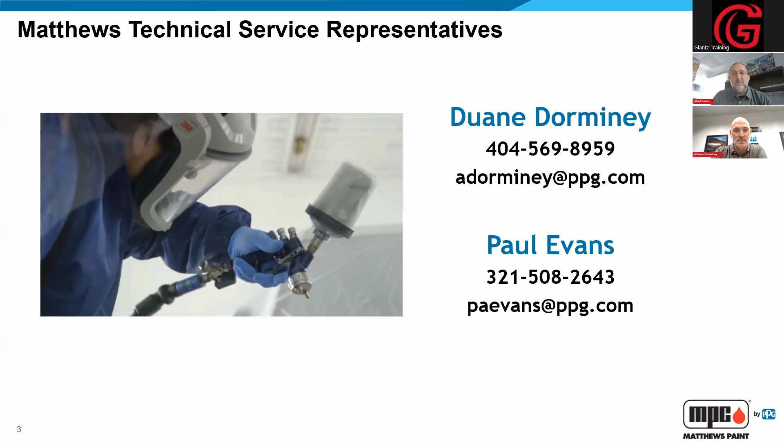All right, so the topic today is about primers. Primers are going to build the foundation of any job that we do. That's where we're going to start. What do we need to do to get this ready for paint? So if we look at primers, we also refer to them as being undercoats. And if you really get into it, there's different categories of primers. There's a few that we really focus on in our industry. So let's look at a few of these different types of primers and where they're used.

Etch primers. Just like the name says, an etch primer actually etches into bare metal. It does provide adhesion, provides corrosion protection, and that's done through an acid. And if you'll notice, our etch primers all come with their catalyst in a plastic bottle. We can't put acid into a metal can. So that lets you know right away there is acid in there. That is what's giving us adhesion. It actually bites into that surface and creates a barrier that helps protect the metal and give us adhesion for the top coat that goes on top of it.

These are not filling primers. We've had some primers in the past that were referred to as fillers. Out there in our world they were used that way, but they weren't really designed for filling. They are generally not designed for sanding. You can sand them if you need to, if there's imperfection, or if you just get past that top coat window, but that's not what they're designed for. They're designed to be sprayed on and then top coated over, usually in about 30 minutes, and depending on the temperature, usually it's considerably less than that.

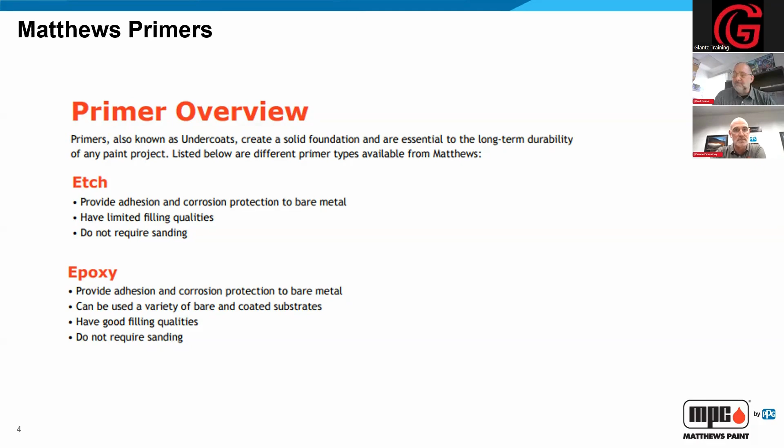Our epoxy primer, the 274, 528, 530, 531, that series has a 4-day top coat window. So that really gives you a lot of time before you would actually have to sand it. So very universal. They'll go on a lot of things. They are a little slower. That's the only real drawback, is that they are a little bit slower than the etch primers. And really, when you compare the two, you're talking about 15 minutes or so difference. You can really top coat the epoxy in about 30 minutes as long as you put one coat on. But great product. It's my go-to. I really do like epoxy primers.

Beyond that, we want to add polyester primers. Now, this is where we... Paul, I have to jump in. Sorry, there's a little bit of delay apparently from the internet connection.

I want to add to something you just said because it was a great point. Etch primers are the fastest primer that we have. If you want speed and production through your paint shop, etch primer is going to be the way to go. But etch primer has that restriction that Paul pointed out of bare metal only. And where shops run into potential problems, what we see commonly in the shops we go into, is when a piece of aluminum has to be repaired with a little bit of body filler, there's a little scratch, a gouge, or a dent that needs to be fixed. That eliminates etch primer as a possibility because there is no adhesion from that etch primer on top of that body filler.

And when you apply paint over that etch primer that isn't adhered to the metal below, it leaves an outline and a ring around whatever's underneath it, and there is no adhesion to the metal in between those two things. So that's where epoxy comes into play, and it can go over the metal and the body filler. Everything will be hunky-dory, just fine. And as Paul mentioned, you've got to wait an extra 10-15 minutes for flash and for it to be solid enough to paint over. But given that, it's a much better option if you're not dealing with perfectly clean bare metal only.

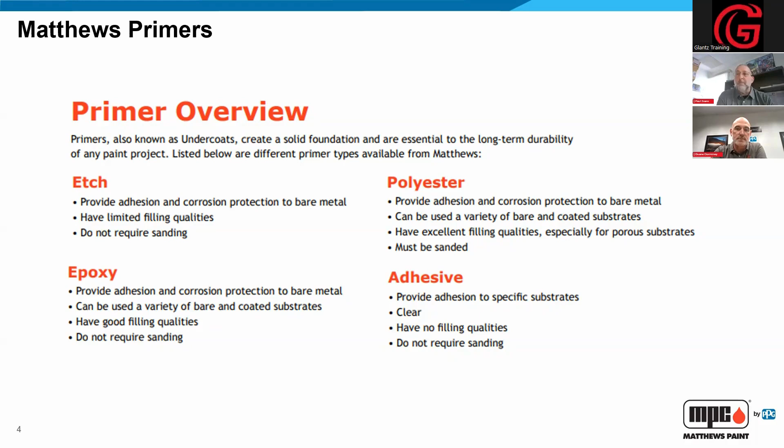One thing else to add here: all the primers Paul has covered here, etch, epoxy, polyester, and our adhesives, they're all chromate free, heavy metal free. They don't get you sideways with any of the EPA rules regarding any of that stuff. Some of the older etch primers Paul mentioned used to have the word filler in the name, but those have all been discontinued because of the heavy metal restrictions and the rules.

So we have our chromate free etch primer, 74-350, and we have our brilliant white primer that's also an etch primer. Those are our two options in that category. Paul mentioned the epoxy, and then we're going to talk more about polyester after substrates.

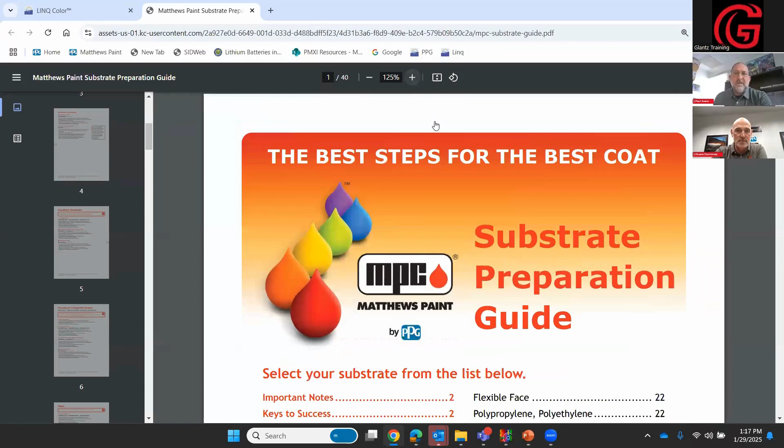Excellent. Very good. And what I'm showing on the screen now is our substrate preparation guide. This is on our website. And if this works properly, it should take me there. Okay, let me pull it over here. And this is right from the website. All right, let me just bump this up a little bit bigger. All right, I think that might be a little easier on your end to see. This is a fairly large book, as you'll see. Here's the index on the front page.

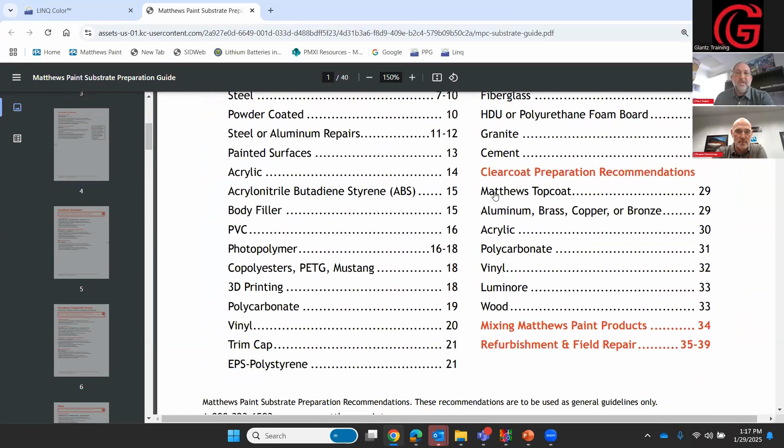And there's about 40 pages roughly of different substrates and what those preparation steps are. How do we clean it? What primers can we use? What's the preparation steps? If it requires sanding, what sanding grits can we use? So we won't have time on this call to go through all of these, but I would like to hit some of the most common ones.

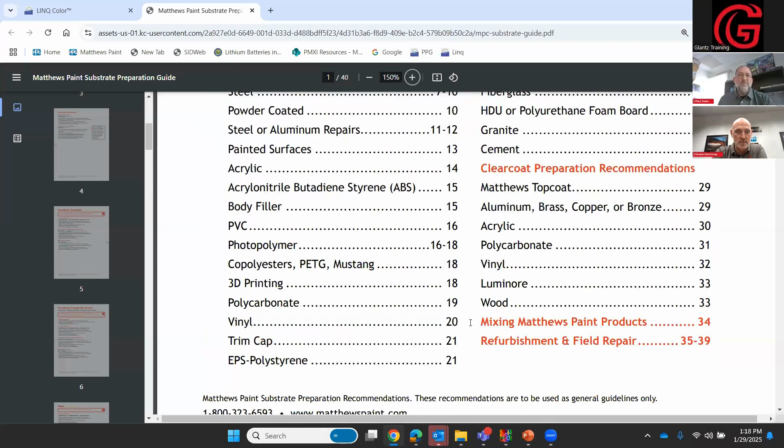And we'll start out with aluminum. Probably the most common substrate in our industry is going to be aluminum. There's some good information in here. If you don't have our substrate guide or if you've never looked at it, I encourage you to go to our website, pull it up, and you'll see there's a lot of good information here. We have this available as a booklet. If you want a printed copy, we can make those available to you as well.

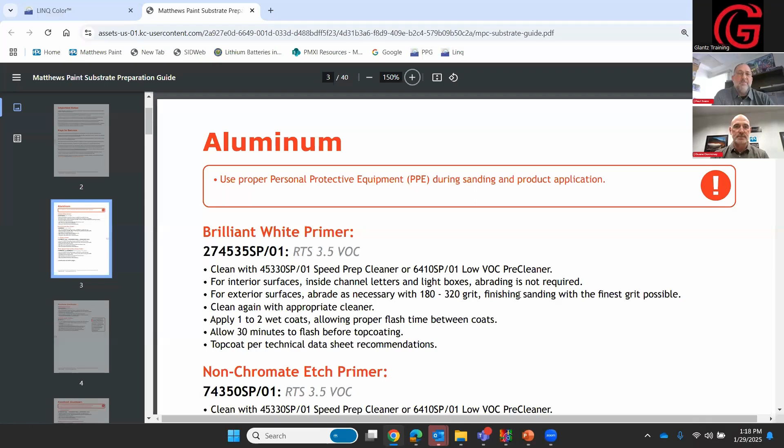So this is the way it starts out. We start with aluminum and it lists out the various primers. You'll see the first one here is Brilliant White Primer. So Brilliant White is an etching primer. As Duane said, we have a couple of primers and they are chromate free. The names of these two primers, I'm going to scroll up a little bit more so you can see the two of them. There, I'll stop it right there. So Brilliant White, 274535, and non-chromate etch primer, 74350.

I like to talk about these simultaneously because they are similar products. They're etching primers. They are both 3.5 VOC. They are both chromate free. Really, the only big difference is the fact that Brilliant White is white. The non-chromate etch primer, 74350, is a greenish color, kind of a military green. It actually sprays nice. It's easy to see it going on. But in our world, many times a white primer has a lot of advantages.

And the Brilliant White happens to have a dual purpose. It can be used as an exterior primer, or it can be used on what we refer to as interior surfaces, and that's going to be inside of a channel letter, inside of a light box. Now, that box might go outside, but it's not exposed. It's inside a closed box for reflectivity. This is a great product to use. So now you have one primer. You can prime the inside, you can prime the outside, and then the inside's done. It's white, it's reflective, and that's all you need.

The green version, which is the 74350, actually has more pigment in it. So it covers better. You'll see as you spray that green version, your metal will cover immediately. One good coat and it's done. Now the Brilliant White, to keep it white, we have to leave some of those ingredients out to make sure it stays nice and bright. So it can have a little bit of a transparency to it. Probably one of the biggest things is people, when they started using the Brilliant White, were putting it on too lightly. It needs to have a good coat, and depending on the circumstances, possibly two coats.

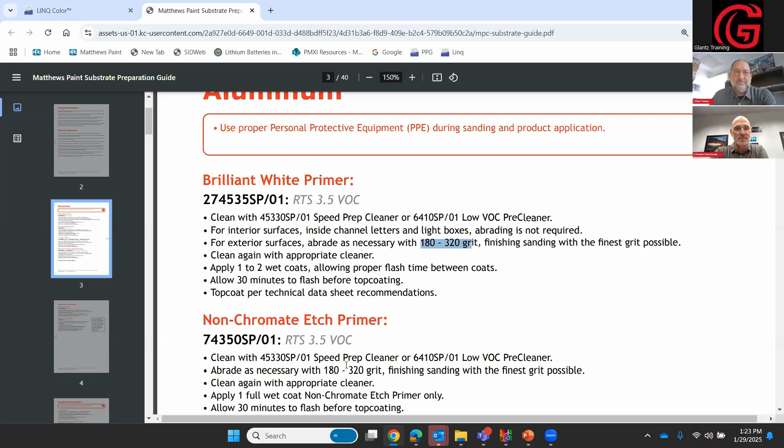Dwayne, anything to add on the etch primers for aluminum? The only thing I would add to that is you mentioned solids content at the very end. Just for a simple explanation, when your paint is liquid, it's got a bunch of solvents in it. And the solids content is what is left on the surface after that paint dries. So these new versions leave literally double the amount of film on the surface than the old ones used to. Great point. Thanks, Blaine.

That'll move us into the epoxies. The one I'm going to focus on is the 2.1 epoxies. You'll see that right in the middle of the screen. There are three different colors, three part numbers: a gray, white, and a black. I've sprayed a lot of epoxy primer in my career. I started painting back in 1984, and I've sprayed gallon upon gallon of epoxy primers. This is my favorite by far. Very easy to work with. It sprays very nicely. It goes on like paint, and it actually looks like paint. And as we mentioned earlier, it is more universal. It'll go on more substrates.

If you're spraying an etching primer on a large surface, one of the things you'll notice, especially in a warmer climate, is you're going to have a lot of dust from that overspray because they are drying faster. So depending on your booth, how quickly it's evacuating the overspray, that overspray may dry in the air and end up back on the surface as dust. And that can create problems in that paint job. Epoxy primers do have a wetter initial period. They go on smoother, they go on wetter, but you end up with a cleaner paint booth, if that makes sense. You just don't have that dry spray.

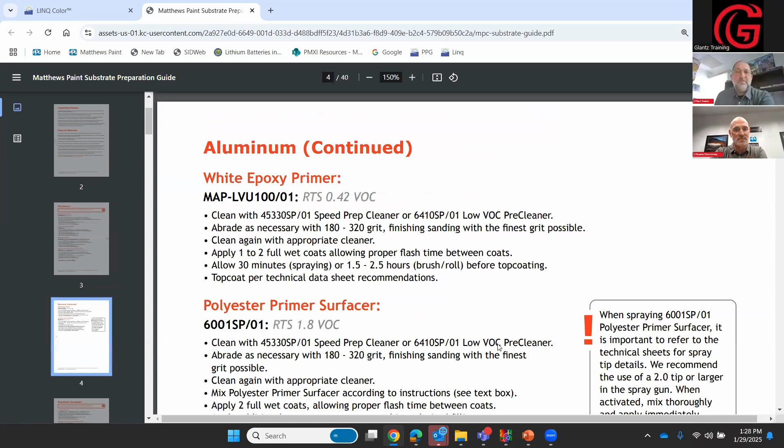All right, so I'm just going to kind of scroll through here. I'm not going to go through every single primer on here. I want to touch base on a few different substrates. And as you can see, there's a lot of recommendations for a lot of these various substrates.

Paul, can you back me up there and chat about anodized? I can.

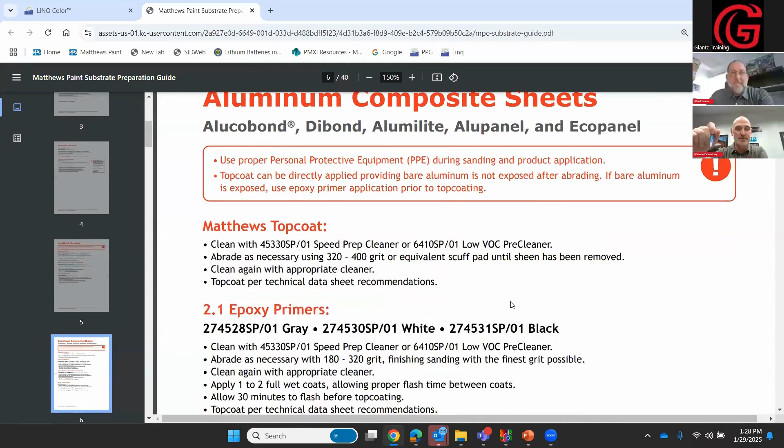Just point out the one key thing with anodized there, because we do run into this from time to time: if you get a piece of anodized aluminum, that anodized coating is made to not have anything stick to it. It's super durable. It is very hard. And the other side of that is paint doesn't like to stick to it when you try to paint on top of it.

So our recommendation, what I always say when I teach classes, is when you look at the substrate guide, you need to read this red box at the top of each section at least one time, because there's some important information in there every once in a while. And this is one example of that. So when you come across anodized, you got to get all that off. And sometimes it's better just to scrap it, start with bare milled aluminum versus trying to get all the anodized out of an extruded piece or something like that.

So pay attention to the type of aluminum that's coming through on the jobs. And if it's got to be painted, try to get regular aluminum and leave the anodized pieces for stuff that isn't going to get painted.

Very good point. And you'll notice that we don't list any etch primers in this section, epoxy only, because we know there's probably a good chance that some of that anodized coating is going to get left behind. As Duane said, the goal is remove it all. If you don't remove it all, an etch primer isn't going to be able to reach the bare metal. So if anything has a chance to stick to it, the epoxy will. But the best option, our recommendation, is get it off of there, and then you're starting basically with bare aluminum.

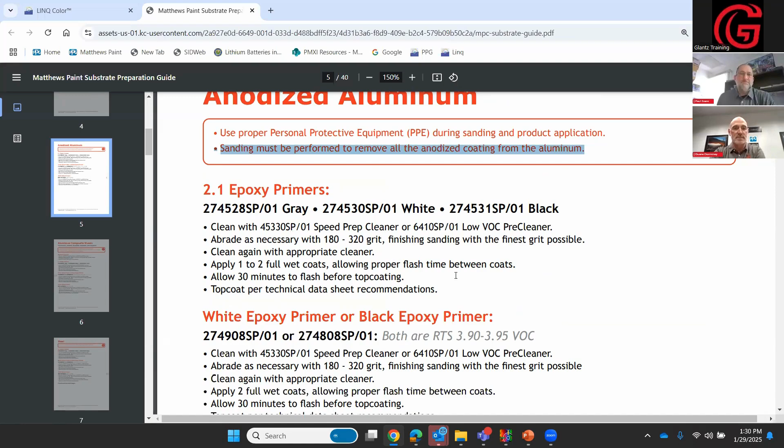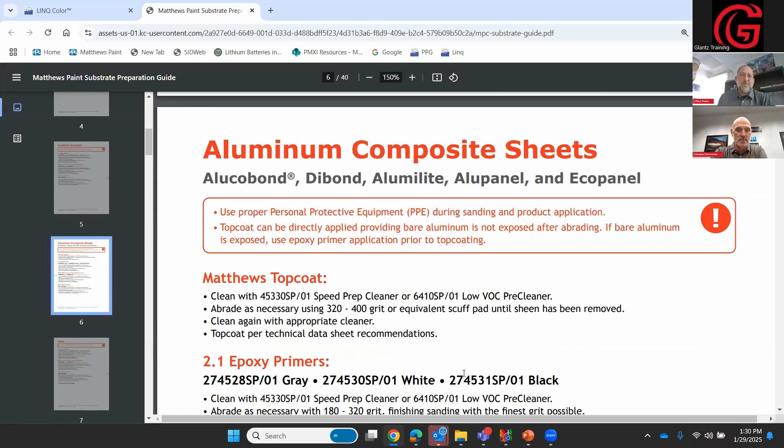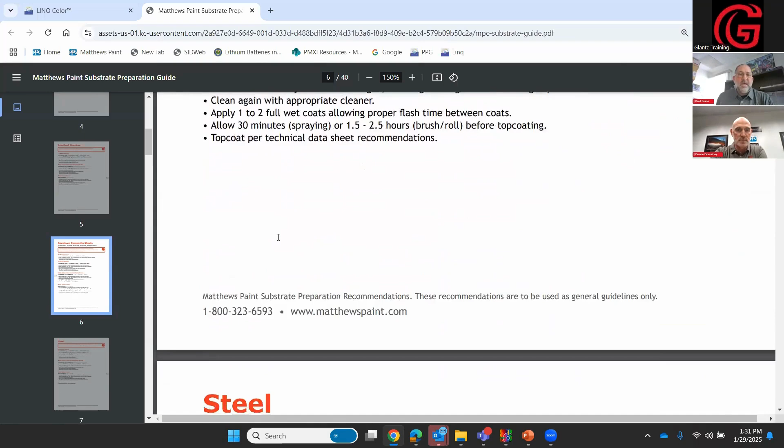Okay, I'm going to roll through here. Aluminum composite sheets, I'll touch on that quickly because these are quite common in our industry. So pre-coated aluminum, you can actually just clean them and sand them or scuff them, either one. And as long as you don't break through anywhere, you can apply our top coat right directly over that. If you do break through somewhere, you get a little heavy when you're sanding it, a little too aggressive, epoxy primer is a great option. And you'll see many of the prep steps are repeated over and over again. So the goal is just find out, based on that substrate, which primers can I use.

Steel, you're going to see epoxy primers listed first. We usually put the primers first that we feel make the most sense. We do have etching primers listed under steel, but my personal preference is epoxy primer. It just works better generally. It's a little bit more durable.

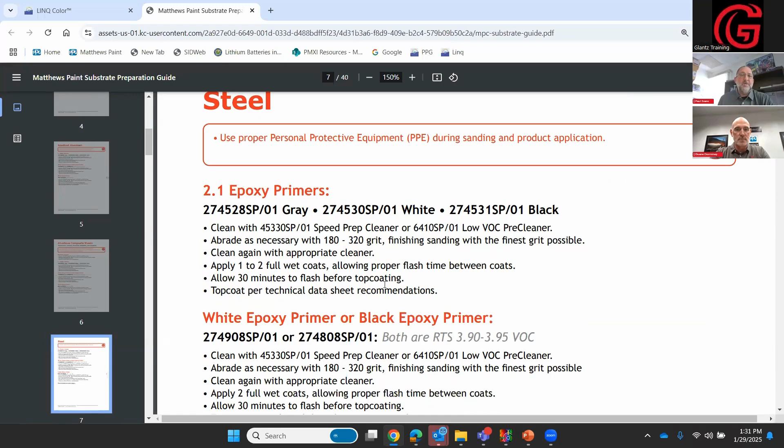Steel, you might have the rust issue. You may already have some rust on there. The idea is get it clean. Make sure it's all off of there. We know that doesn't always happen. So epoxy primers are a little bit more robust as far as sealing that down. But we would recommend getting everything as clean as possible. And then the epoxy primers work extremely well.

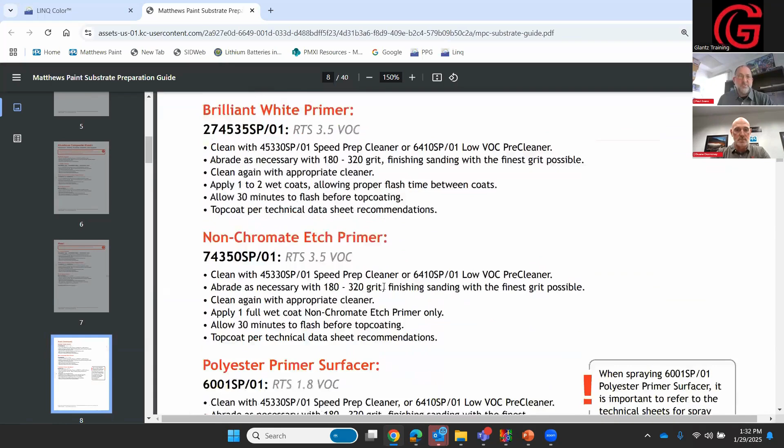Now I'm going to scroll through a couple of other subcategories. And you'll see there's steel, there's the etch primers listed. You can even use a polyester primer. And then we're going to get to galvanized steel. There's a lot of different things in this category. As Dwayne talked about, the red print in these boxes, you'll notice a lot of information. I'm just highlighting it there quickly. This is important information, especially with galvanized steel. If you are working on a project and you have an option, I prefer not to use galvanized steel.

Galvanized steel is generally left galvanized because it's designed to stand up on its own, to have its own protection from that galvanizing. If it has been galvanized, there's oftentimes going to be oils, protective layers that are put on there, passivation layers. These are all things that can create problems.

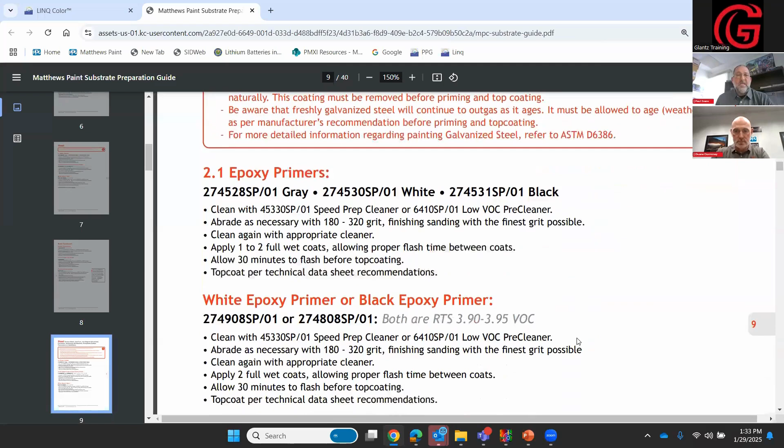Even if it's newly galvanized, that outgassing of the zinc, those are all things that could potentially create a problem on galvanized steel. So cleaning it thoroughly, allowing it to age as much as possible, that does help you. If you are ordering galvanized steel, ask that it not be passivated. Just get the galvanized steel as it is, and then you can follow these steps. Thorough cleaning, thorough sanding, and then epoxy primers are going to be your best option on galvanized.

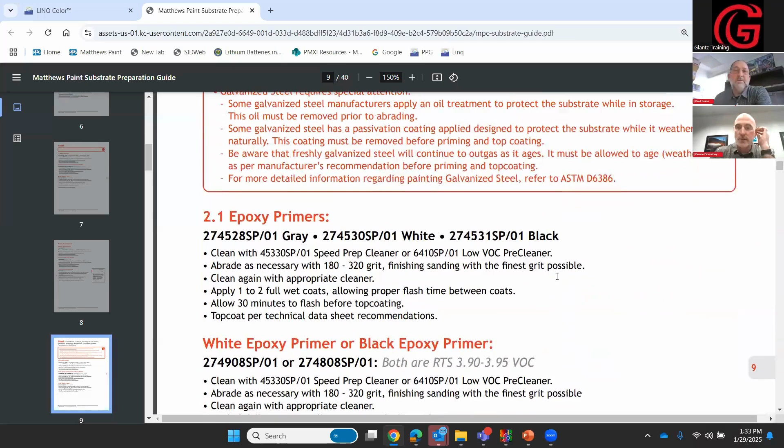Hey, so Paul, we got one question in the chat already, and we're going to leave some time at the end of this thing for a full question and answer, but this one is timely. Do we recommend spraying epoxy primer before polyester?

Oh, that's a great question. I think that's absolutely fine to do. In the automotive restoration world, that's kind of a must. Everything gets epoxy primer first, and then your body filler, which remember, we said polyester primers are very similar to body filler, same chemistry, goes on top of the epoxy primer. What you're basically doing is you're priming, you're encapsulating that bare metal, and then you're going to put something on top to give you your fill, whether that be a body filler or a polyester primer.

The important thing there is to make sure you allow enough time. Depending on how heavy you put your epoxy primer, it really is best, in my opinion, just to be on the safe side, wait overnight, and then you can come back. I'm not saying you can't go faster than that, but if you get on that epoxy primer too quickly, that's when it can cause problems. So overnight is a safe bet.

You don't necessarily need to do that process. It may be overkill in our world, but it is a good way to do things because now you've got a good protective layer underneath the polyester. And especially if it's steel, you now have that steel that has been protected. And then you put your filler on top of that. So, Dwayne, anything to add?

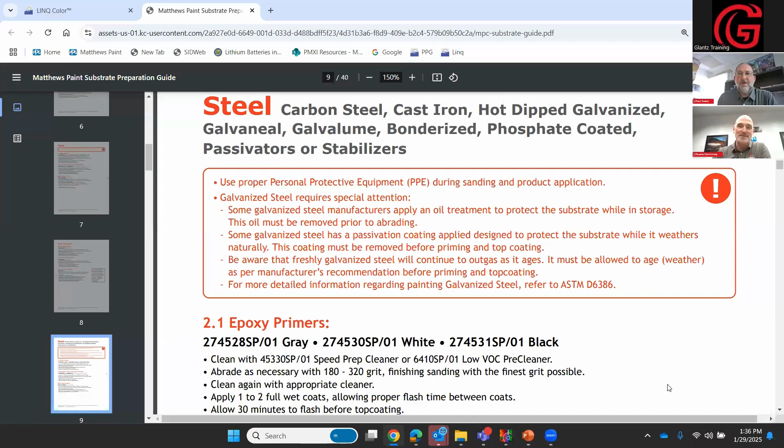Okay, I'm going to scroll down through here. You'll see the epoxies listed. I'm going to get down to stainless steel. Now, I realize stainless steel probably isn't a common substrate, but every once in a while, you're going to have something. I get calls on a fairly regular basis of what do we do with stainless steel? I've heard everything out there as far as every kind of primer or adhesion promoter. But we only have one recommendation.

And you will notice it's the 2.1 epoxy primers. Again, this is a primer that is very durable. It holds up well, and it is the only recommendation we have for priming stainless steel. Now, one thing I do want to point out here, most of these steps are very similar over and over again, but here's an exception, 80 grit. With most bare metals, we can go 180 to 320, somewhere in there. But now we're looking at an 80 grit. Stainless steel is just so hard. We need to make sure we're putting a good thorough sand scratch on there.

So clean it good. And by the way, I hit that earlier and I wanted to expand on it a little bit and I forgot. The reason that we clean first before we start sanding, and then have to clean it again, we clean it first to make sure we get all those contaminants.

Anything that could be on that surface, we want to get it off before we start sanding it, regardless of the substrate. If you're going to start sanding something, our first step is always going to be clean it first with the appropriate cleaners. And you will see those cleaners listed on each one of these substrates. It prevents you from driving contaminants down into the substrate. It also helps protect your sandpaper and make your sandpaper last longer and cut better.

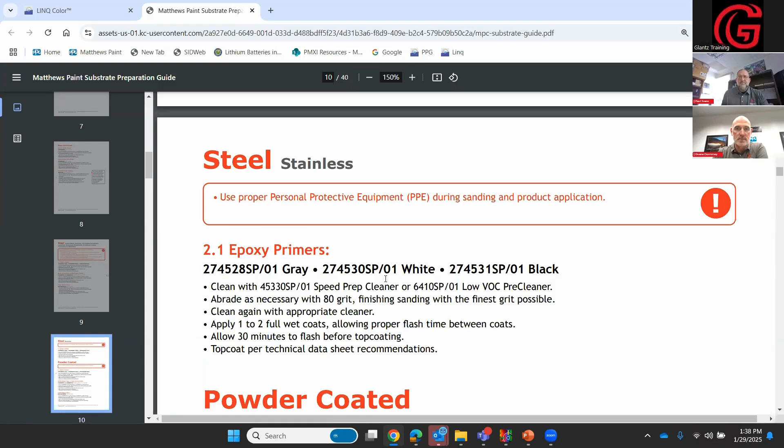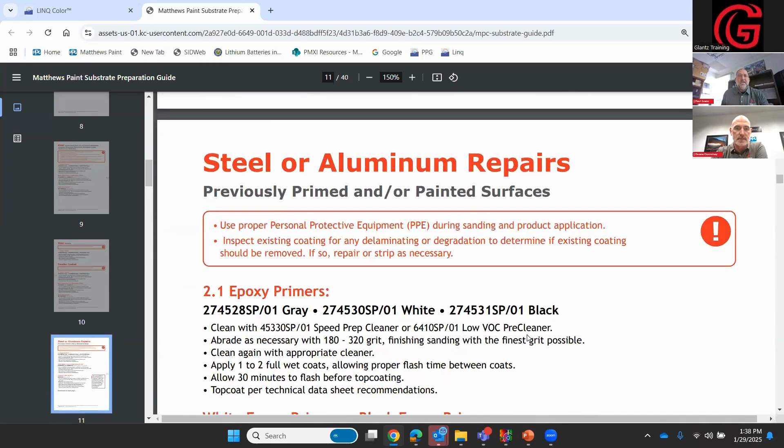So clean it thoroughly, sand it thoroughly, clean it again, and then epoxy primer, and it works great on stainless steel. All right, I'm just going to kind of roll through here, just like you did on the last one. Any questions about a specific substrate, you can jump in there in the chat, and we'll either cover it or back up to it. Steel and aluminum repairs.

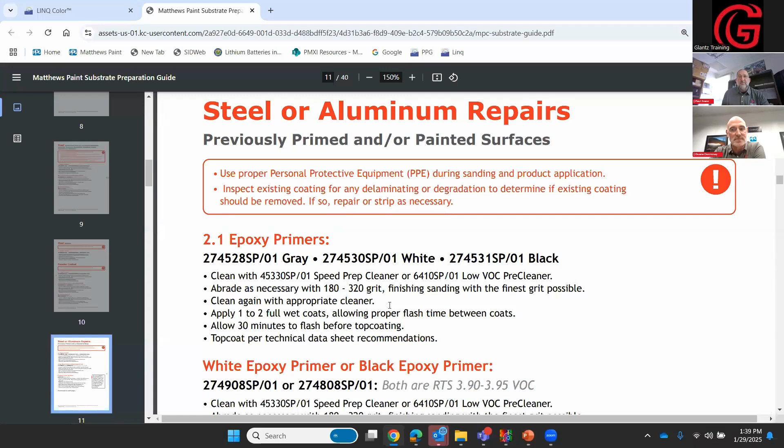This is when we actually have something that is already painted. And you'll notice there's our 2.1 epoxy primer. There's a theme. If you haven't picked up on it yet, there is a theme. 2.1 epoxy goes on a lot of substrates. And especially if you have multiple substrates you're doing at one time, this is a product to use. The only thing I really have found that it doesn't stick well to is acrylics, and plastics can be a challenge to put epoxy primers directly to them. Other than that, epoxies work extremely well.

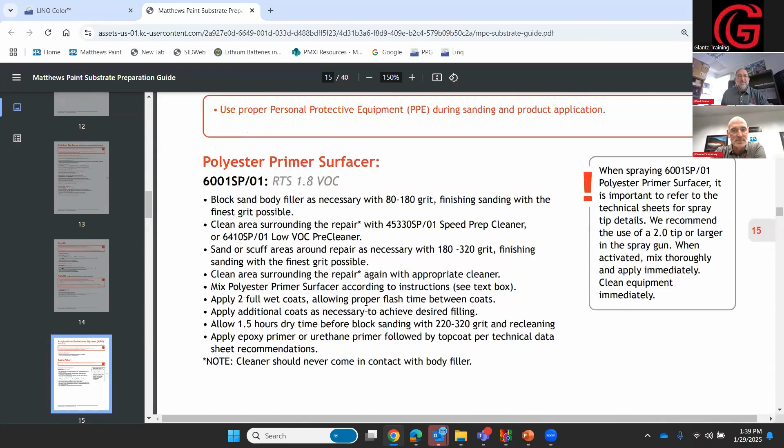But there's your polyester primer. I've kind of skipped over it, even though it's been mentioned a few times. This is the 6001. This has been around for a long time. It can be used on a lot of substrates, but don't use it unless you really need it. And here's a good example of where it works really well. Body filler. So this is a polyester primer. It acts differently. As I mentioned earlier, it gets very hard. It has to be sanded.

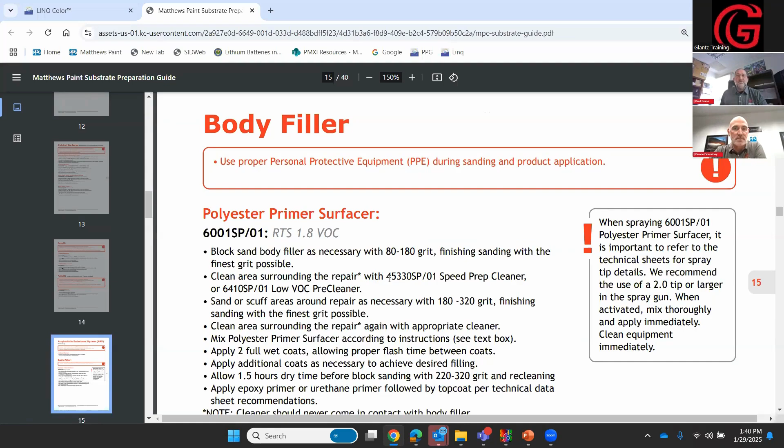I'm going to spend more time at the end. This is one of our key focuses in this webinar, the polyester primer. So other than the fact that it works great on body filler, that's about all I want to touch on right now. And I want to scroll through a few more of these, and then we'll circle back and spend some time on the polyester.

PVC, we can paint PVC quite easily, but you will notice something. There's polyester primer mentioned, but on the PVC, and I had a call on this yesterday, stick to the edge. If you have that cut expanded PVC, that rough edge that's very porous, this is a great product to use. But remember what I said, it's hard. It's not flexible. Keep it on that edge. And this is where I would recommend using a roller. That way you can keep it confined just to that edge.

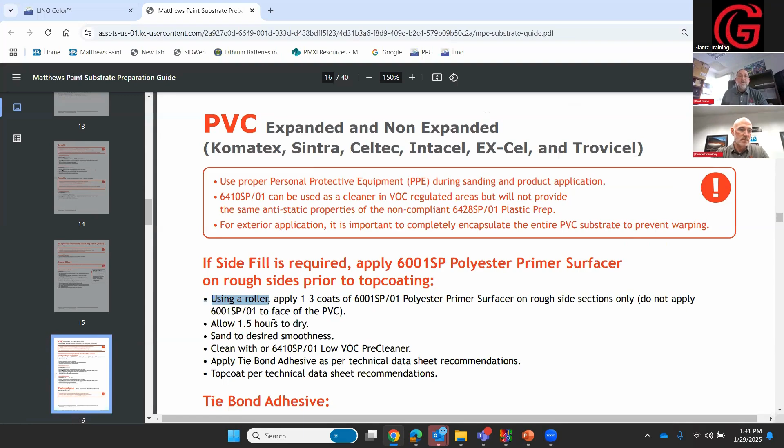Roll the 6001, let it dry, generally an hour and a half, depending on the temperature. It may be even sooner than that. But you just scuff it or sand it to whatever level you need it. And then you can do the face of the PVC as normal. And Tie Bond is a great primer for the PVC. But that's just another place where you can use a polyester primer.

But don't put it on the face, because it can lead to problems with the PVC expanding and contracting, and that polyester being just too hard to move with it. On the side, it's fine. On the face, stay away from it.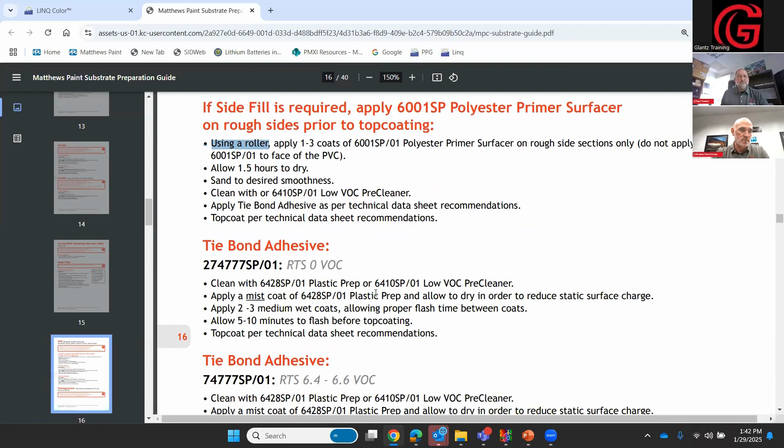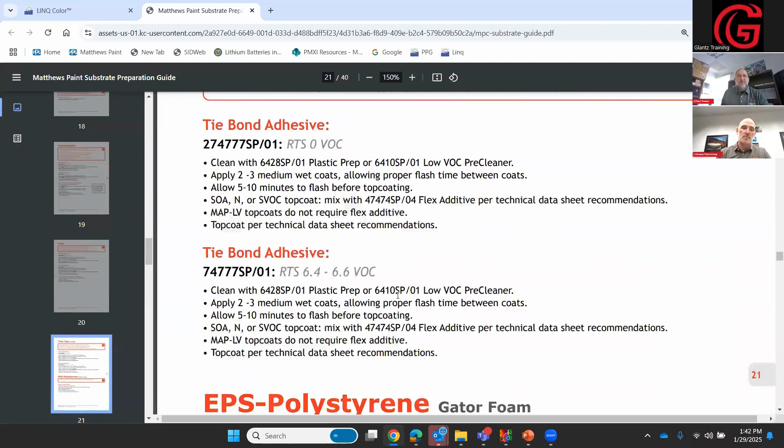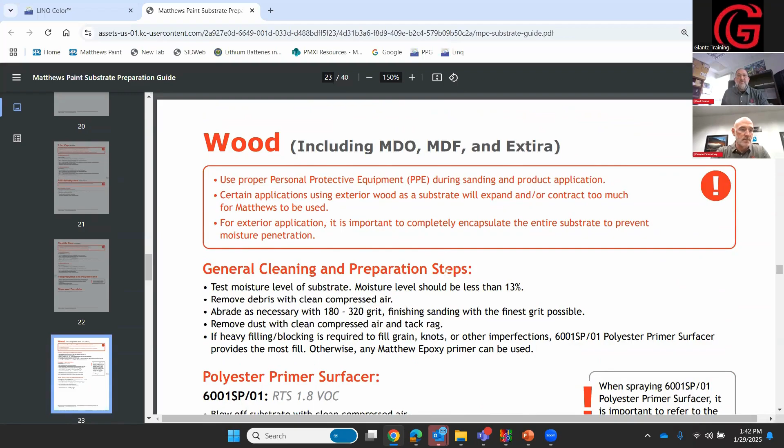Okay, let me roll through these. And I want to get down to, and there's wood. And again, you will see some special considerations when it comes to working with wood. So as Dwayne mentioned, take some time, read through here. If you're going to be working on one of these substrates, make sure you know all of our tips and tricks.

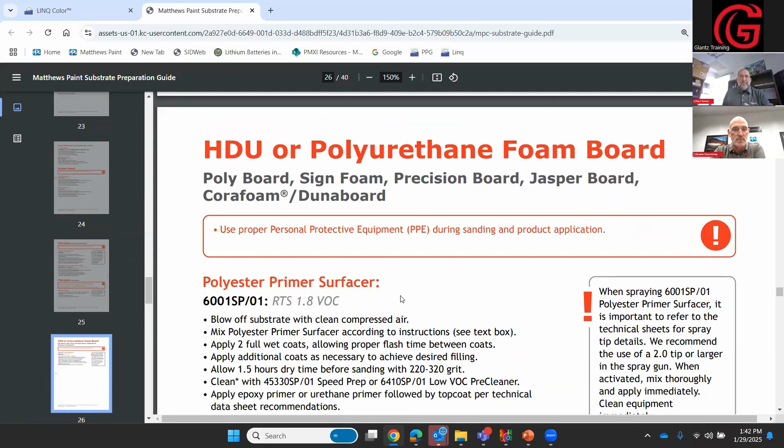And here is HDU foam board. So high density urethane or polyurethane foam board, very common in our industry. Another great place to use a polyester primer. So these are all places where we would use a filling primer, and this is going to be a great product to use.

So what I want to do now, I'm going to get out of here and come back over here. And let's spend a little bit of time talking about our latest product that was just released, I guess a few months back, I can't remember now, but the High Build Polyester Primer Surfacer 6002 SP.

So this is taking the place of your 6001. If you're familiar with 6001, this is a better product. Everything about it is really better. So we'll talk about a comparison between the two. But the 6001 has been discontinued. So if you've been ordering it, you're probably not getting it. The 6002 will be a direct replacement for that product. Newer technology, still a polyester product.

And one of the things about a polyester primer is you will know it by its smell. You can't get away from that. It is that Bondo or body filler. That's the smell that you smell. It's one of the things that's unique about these products; they have a unique smell to them.

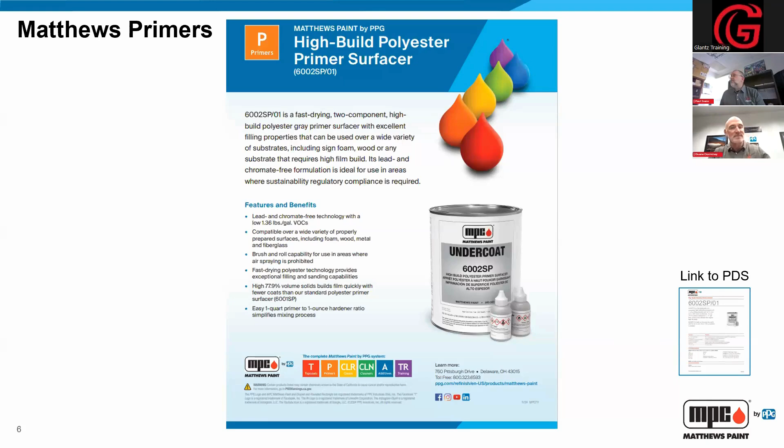So the 6002, there's a sales sheet. I'm actually going to pull up the data sheet here. I believe this will work. There we go. And let's get that. So I'll do a little comparison between the two here on the next slide, but the data sheet is on the website. So if you do get 6002 in place of 6001, it'll be similar, but not exactly the same.

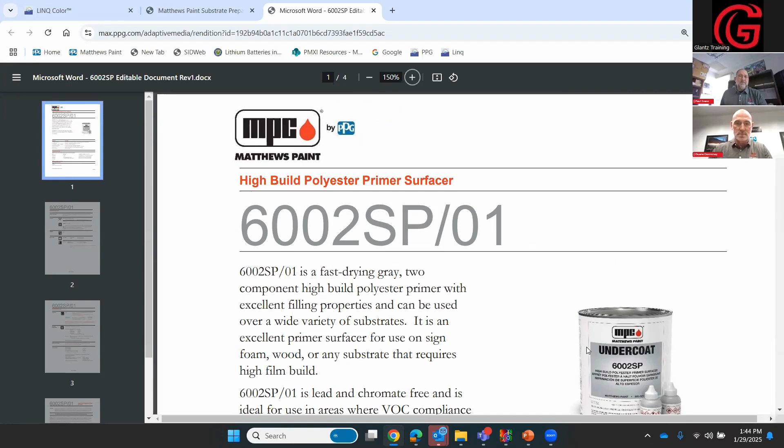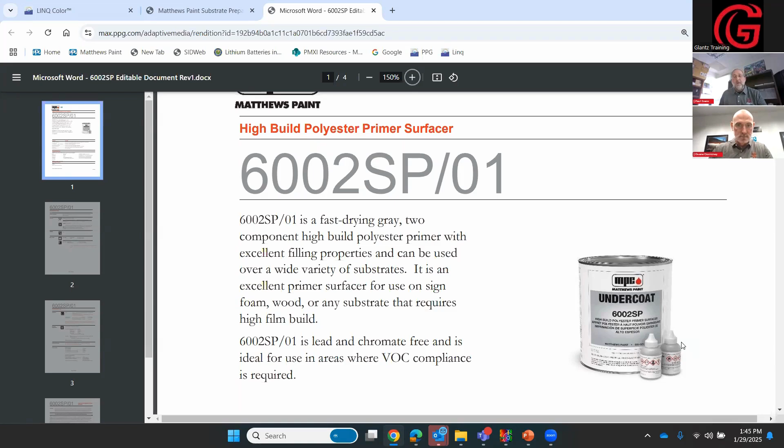And one of the first things you'll notice, the old product, the 6001, came with 4 little tubes of the hardener or the activator. The 6002 comes with 2 bottles, and those are 2-ounce bottles. So you're going to end up with 4 ounces of activator total per gallon, and that comes with the gallon when you order it. So if you do a little quick math in your head, if I've got 4 ounces and I've got 4 quarts of primer being a gallon, it's going to be one ounce per quart.

Now, when it comes to a polyester primer, if you've ever worked with the body filler, as I mentioned before, and you start to work that body filler, you start to mix the hardener into it. If you've gone too far, if you put too much in there and you can't get it off the board before you can get it on the panel, you put too much in. So you remix it, you put in less, you get more working time.

As long as the product is in there, and I would say anywhere from half the recommended amount to the full amount, it is going to kick over. But if you leave some of that hardener out, it'll give you more working time. So it depends on the size of the job. How far are you trying to go? How much time do you have to work with it? That's how you'll decide, should I use a little less?

I want to be very clear. This is the only time that you'll ever hear Dwayne or myself say that you can change the amount of hardener, because it's a little different product. The chemistry here is much different than our primers or our top coats. It is going to kick over and you can control it by how much of that product you put in there. So just keep that in mind.

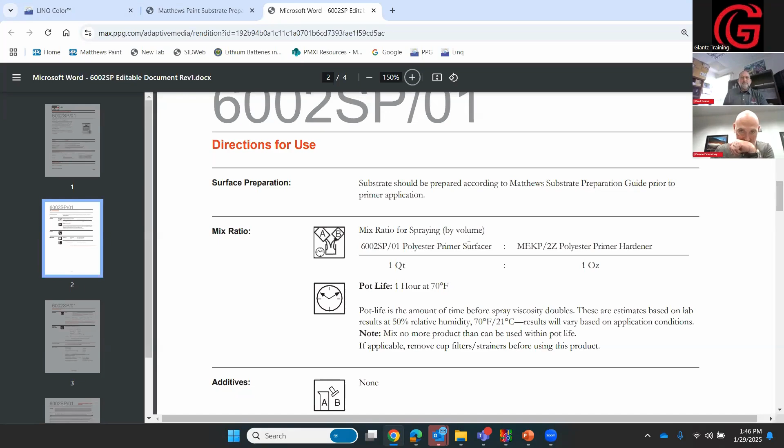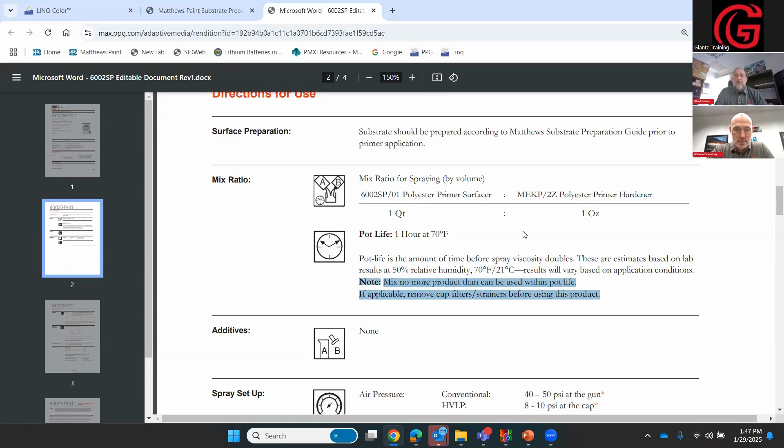You will notice if you've used this product, let me see. I want to focus on a few things as we go. Here's an important note. Don't try to strain this product. If you're using a paint gun with a strainer in the cup or a disposable cup system with the strainer built into it, remove those strainers before you try to spray it. This is a very thick product. It's designed to fill. It has all that talc in there, as I mentioned earlier. So therefore, it's not going to go through a strainer very well. So pull that strainer out. So that's an important thing to note.

And then your gun size recommendation. So anywhere from a 1.4 to a 2.0, I really like it out of a 2.0 fluid tip. That's a large fluid tip for those of you that are familiar with spray guns, and that number should mean a pretty big fluid opening because it's going to put some product out. But it does a really good job with this thicker product.

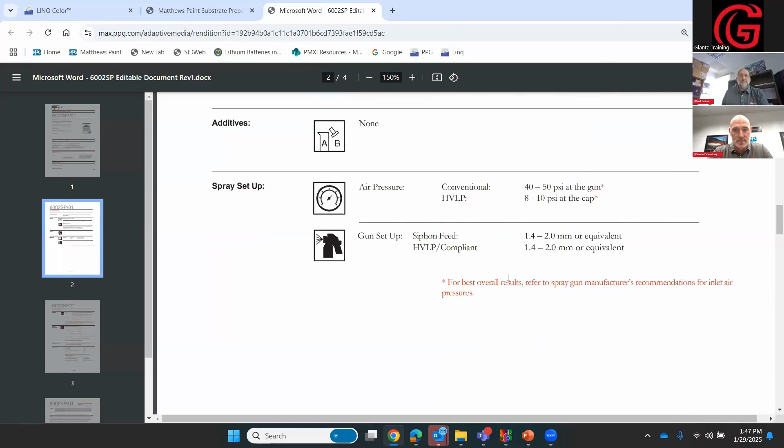As you work through the data sheet, you'll see recommended film build. Generally, 2 to 3 wet coats is going to be good. And we have a drying time section, dry to sand, about an hour and a half, depending on how heavy you put it on, depending on how much activator you use. That's just a general guideline.

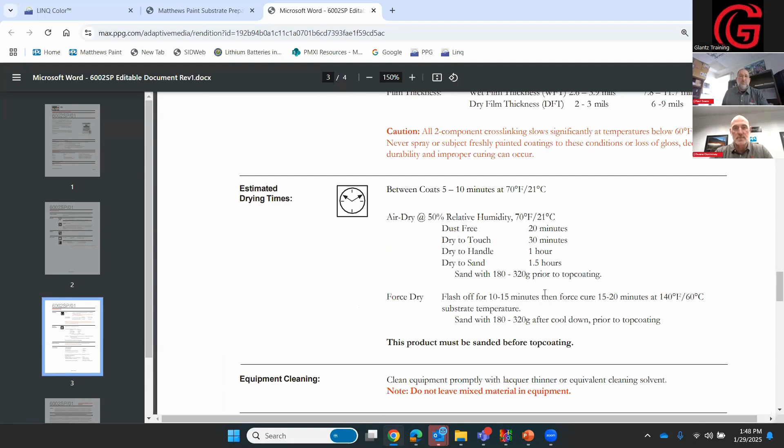You'll know this product when it feels nice and firm and you can start to sand it and it powders up, you know you're ready to go. So there's a lot of variables, but it'll let you know when it's ready. And if it's still soft, just give it some more time. It kicks over quite quickly. So that's the data sheet. I'll just do one more thing here. We'll open this up to some Q&A.

So just to compare the two, when you look at the 6001 and 6002, this is really what it comes down to. Pot life with 6001, very short. It says 30 to 40 minutes, and I guarantee you at 30 minutes, you need to be starting to pour that product out of your gun and cleaning it. With the 6002, you've got a good hour. That's a much more reasonable working time. So you don't have that fear of it kicking over in the gun before you get it out.

Solids content. You can see we go from 51.9% with 6001 up to almost 78%. And that's that solids that Dwayne mentioned. That's what's left behind when all that solvent comes out. That's the product that's left behind. That's why this is a high build polyester primer. And VOC, it's actually lower in VOC. So it's just a more environmentally friendly product.

And aside from that, I will say this, from working with this product, I think it sprays better. I think it sands better. But you decide that for yourself. You'll get the product, try it, and let us know how it works for you.

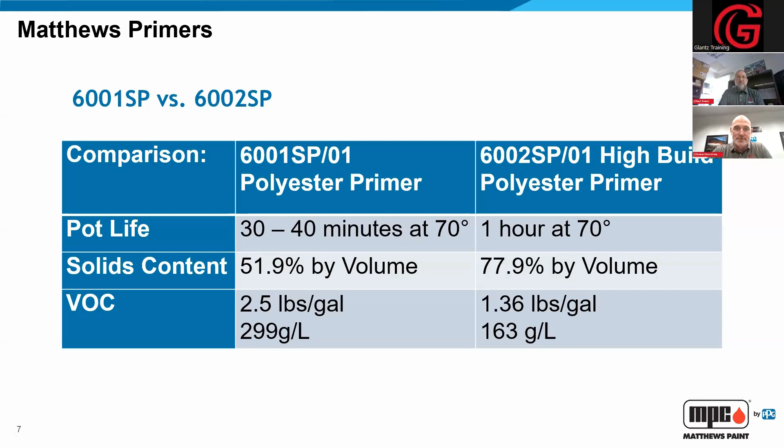So excellent. With that said, unless Dwayne has anything else to add, we'll open it up to some Q&A. We had a couple of quick minor questions in the chat that I was able to respond to by chat, or that you answered while you were talking, Paul. So yeah, open it up to the rest of the floor. Bria, if you don't mind allowing questions to come through. I don't know how you do that, if people can speak or if they should type them in the chat. I have one person's hand raised. Let me let them talk, 1 second. I don't see my hand raiser. Oh, there you are. Jason. Jason, you're on mute, sir. Yep. There, bottom left. Perfect. Can you hear me? We got you. Yes. Go ahead, Jason.

Question. So on the 6002, you were saying to take the strainer out. That's correct. Okay. Are you supposed to do that with the 6001 as well? That is correct. It'll spray for a little while, and you'll notice the gun will start to starve out if you leave that strainer in there. And some of our shops will end up using a strainer actually designed for waterborne paint, which we don't recommend, but it just happens. And that's a finer mesh, and you're going to get very little out of it. So usually you learn pretty quickly, oh, wait a minute, this isn't working. So yes, that's been a recommendation with that product as well.